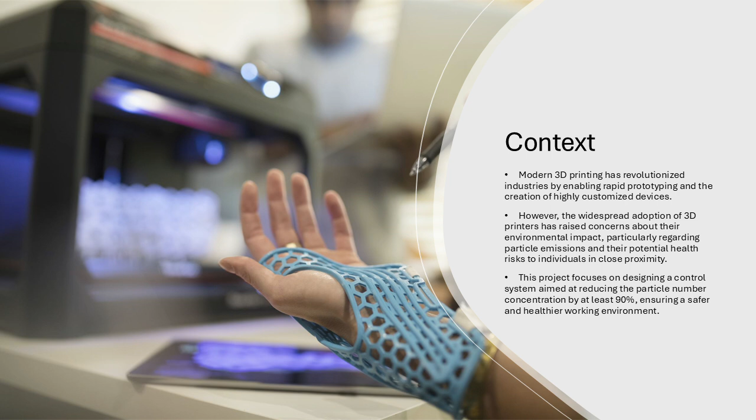So modern 3D printing has revolutionized industries by enabling rapid prototyping and the creation of highly customized devices. However, the widespread adoption of 3D printers has raised concerns of environmental and human health impacts. So the project we're working on today focuses on designing a control system aimed at reducing the particle number concentration by at least 90% to ensure a safer and healthier working environment.

So just some design parameters for this project. We looked at a typical 140 cubic meter makerspace with 10 3D printers. In this space, the particle number concentrations were found to reach up to 25,000 particles per cubic centimeter with a geometric mean diameter of 42 nanometers.

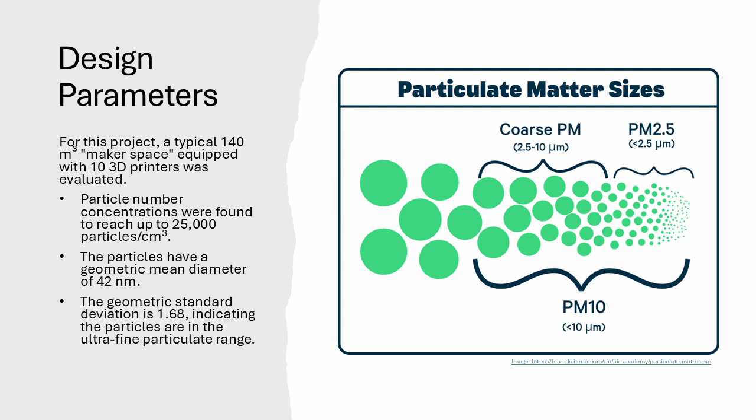This puts the particulate matter in an ultrafine particulate range, which can be very dangerous because smaller particles can penetrate deeper into the lungs, causing more significant and severe health impacts. These symptoms can start out with things like coughing, throat irritation, chest tightness, and shortness of breath, increasing in significance to risk of heart attacks, irregular heartbeat, and even stroke.

Water-based filtration was initially considered as a method for managing ultrafine particle emissions in a 3D printing makerspace. This method operates by passing air through water, where particles are captured through impaction and diffusion. Water filtration systems can remove particles efficiently, achieving up to a 90% reduction, particularly for ultrafine particles under 100 nanometers. These systems also offer advantages such as reduced clogging and waste, making them appealing for continuous use.

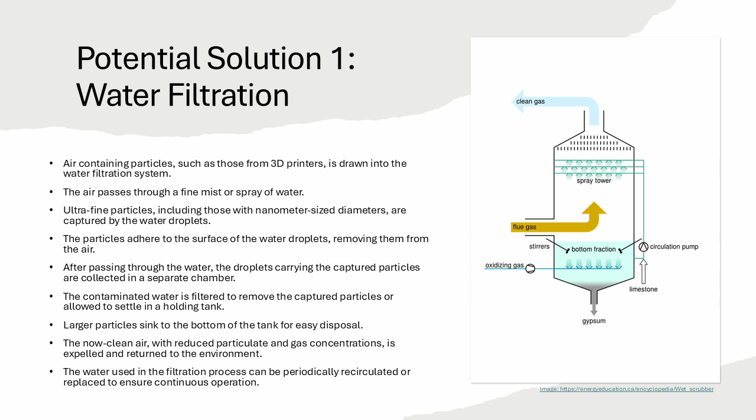However, the practical challenges of maintaining water filtration in a high-use environment became evident. The system requires regular water replacement and specialized drainage, which adds complexity and maintenance demands that could be difficult to manage in a busy makerspace.

MERV, or Minimum Efficiency Reporting Value, is a system used to rate the effectiveness of air filters at trapping particles of various sizes. MERV filters are widely used in air filtration systems to capture particulate matter, including the fine particles emitted by 3D printers. Filters with higher MERV ratings, particularly those in the range of MERV 13 to 16, are highly effective at trapping ultrafine and submicron particles, which are common in 3D printing emissions.

The filtration process involves drawing air containing particulate emissions into the system, where it passes through a series of filters, each designed to capture particles of specific sizes. The higher the MERV rating, the more capable the filter is at capturing smaller particles. As the air flows through these filters, the particles become trapped, reducing airborne particulate concentrations. The cleaned air, now with fewer particulates, is then expelled back into the environment.

While MERV filters are relatively easy to install and require less maintenance compared to water-based filtration systems, they do necessitate regular replacement to maintain their effectiveness. They also face some limitations in environments with higher concentrations of particulates, as is the case with a busy 3D printing space. Combining MERV filtration with local exhaust ventilation can further enhance performance by capturing emissions directly at the source.

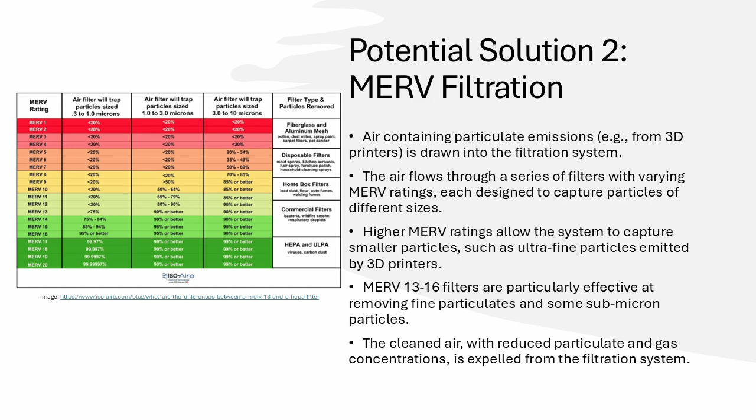All right, moving on to potential solution number 3, we have fume hoods. When these 3D printers are in use, they can, of course, release harmful particles, fumes, and gases into the air, some of which are carcinogenic. Using the fume hood, the contaminated air is drawn into the hood through the front opening, typically through a sash or a door, and in this hood, the system maintains a slightly negative pressure, which pulls the air from the room rather than leaking out.

This negative pressure helps to contain the harmful emissions and prevents them from escaping back into the workplace. Once inside the hood, the airflow carries the contaminants towards the exhaust. This airflow is specifically controlled by the unit. It typically consists of roughly 80 to 120 feet per minute, and this just ensures that all the contaminants are going towards the hood and not back into the room.

After capturing the contaminants, the air is directed either to a filtration system or vented outside. Many fume hoods use filters such as HEPA filters to filter out the particulates within the room. To ensure everything is functioning properly, fume hoods are equipped with airflow monitors.

These monitors are able to track the airflow and alert users if it drops below safe levels, which could be an issue if a filter becomes clogged or if the fan malfunctions. In providing this real-time feedback, it helps ensure the safety of the workers within the room. In short, fume hoods are really vital for keeping the air clean when working with these 3D printers and can prove to be a good tool in achieving clean air.

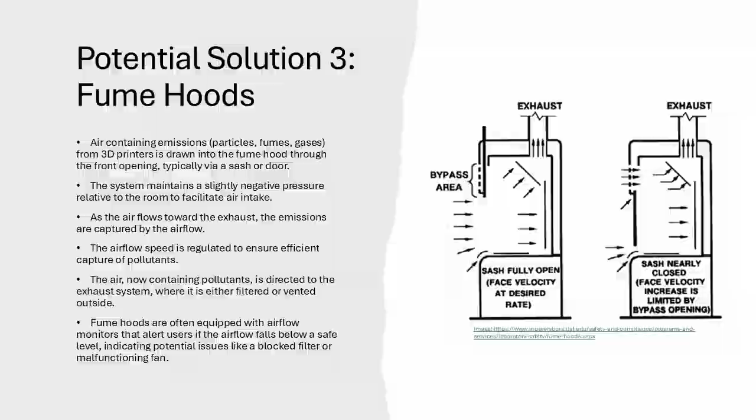The stakeholders impacted by the implementation of a fume hood in a 3D printing environment span several key groups, each with distinct priorities and concerns. First, the primary users, students, researchers, and makers are at the forefront. Their health and safety depend on effective air quality management, as prolonged exposure to ultrafine particles can lead to respiratory issues. A fume hood, by reducing airborne particulates, ensures a safer space without introducing complex waste management challenges.

Second, facility managers and educators play a pivotal role. They are responsible for maintaining compliance with safety regulations and minimizing operational disruptions. The fume hood's efficiency and reduced maintenance requirements align with their need for practical, cost-effective solutions. Unlike filtration systems that generate solid or liquid waste, a fume hood simplifies waste management, easing their logistical burden.

Third, regulatory bodies and environmental agencies are critical stakeholders. As air quality regulations continue to evolve, implementing a fume hood demonstrates proactive adherence to environmental standards. While exhaust emissions require oversight, they present fewer disposal challenges compared to solid waste, offering a more manageable compliance pathway.

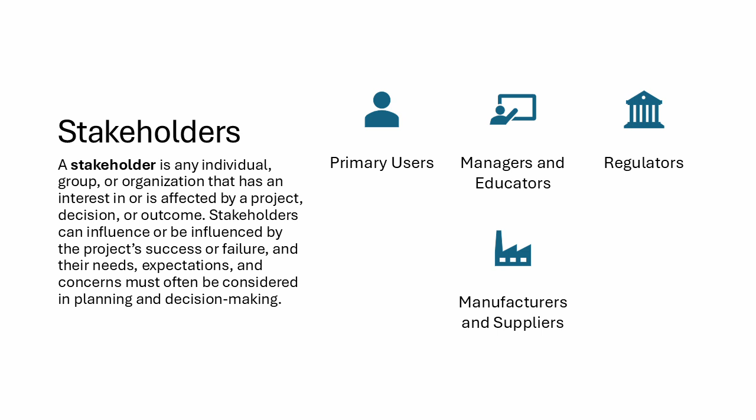Finally, manufacturers and suppliers of 3D printing equipment have a vested interest. By incorporating fume hoods into their designs or offering them as accessories, they can meet growing market demands for sustainability and health-conscious innovation, enhancing their competitive edge. This broad spectrum of stakeholders underscores the importance of balancing safety, efficiency, and environmental responsibility in advancing 3D printing technology.

So, after carefully evaluating the previous options, we chose fume hoods as the optimal solution for managing our emissions from the 3D printers. There are a few key reasons why fume hoods stand out to us. First, in terms of the environmental impact, water and MERV filtration systems produce solid or liquid waste that needs to be properly disposed of, which can be challenging to manage safely, especially in a company that is not used to environmental regulations. In contrast, a fume hood releases particulate matter into the atmosphere, and the exhaust air is way easier to control and manage than solid waste, making it a more sustainable option overall.

When it comes to energy efficiency, fume hoods also are more practical. They're more energy efficient to run compared to water pumps, which often require additional power for filtration and fluid circulation, and it makes the fume hoods more cost effective. Lastly, from an economic standpoint, there are fewer ongoing costs associated with fume hoods. With water filtration systems, there are added expenses for waste removal, energy consumption, and more frequent maintenance. Fume hoods, on the other hand, offer a simpler, more streamlined solution that reduces both waste-related and energy costs.

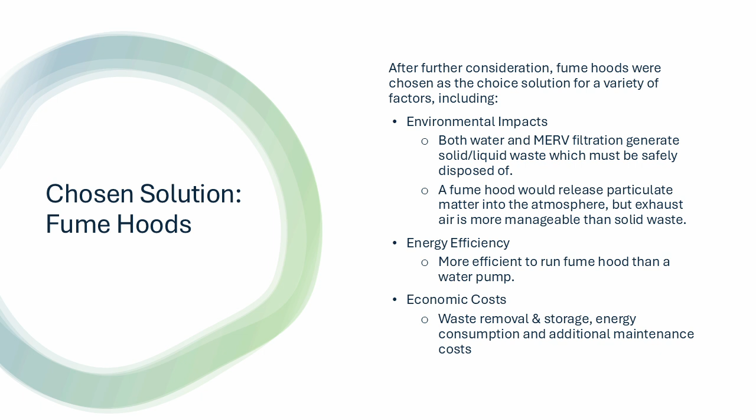Overall, considering environmental impact, energy use, and cost efficiency, fume hoods provide the most balanced and sustainable solution for managing 3D printer emissions. Alright, before we get into designing our fume hood system, we have to talk about our assumptions and given operating parameters.

So for given values, we're given a room size of 140 cubic meters, 10 printers, a particle concentration of 25,000 particles per cubic centimeter, with a mean particle diameter of 42 nanometers, with a geometric standard deviation of 1.68. So our assumed design parameters that we took liberty in with this project is the width of a printer is 0.62 meters, the depth of the printer is 0.626 meters, and the height of the printer is 0.760.

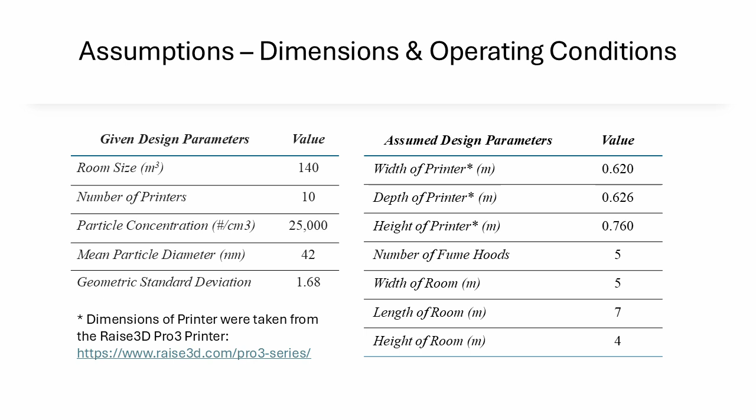We chose a number of 5 fume hoods in total, and the width of the room is 5 meters, the length being 7 meters, and the height being 4 meters. This gives us a total room size of 140 cubic meters. And going back to our design of our printers, all of these design dimensions were taken from the Raise3D Pro 3 printer as shown at the hyperlink at the bottom of this slide.

To model the removal of particles from the makerspace, we must first establish the fume hood's fan flow. The fan flow is based on the face velocity on the opening of the fume hood sash. So as you open the sash farther, the fan will need to increase its speed. The volume of air exhausted will be the summation of each fume hood's fan flow.

The air changes per hour, or ACH, is the measure of how often clean air replaces the volume of a room. In a non-pressurized room, the clean air rate is equal to the volume of air exhausted. It is noteworthy that fume hoods require slightly negative pressure to make sure that all of the air gets exhausted, so the clean air rate will be slightly less than the volume of air exhausted.

As far as the removal efficiency, it's slightly counterintuitive, where the concentration of the upstream air is actually equivalent to the concentration of the exhausted air, and downstream is the concentration of clean air. This is because the original model of removal efficiency is based more on filtration or some other kind of removal, whereas in our case with the fume hood, we're relying on the dilution of the atmosphere.

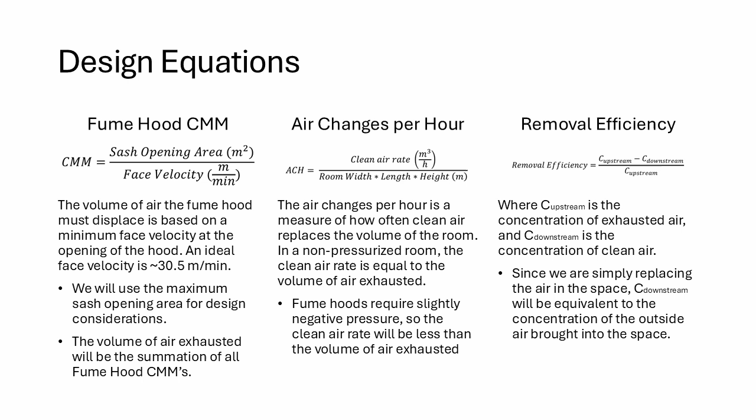The removal efficiency of our fume hood is based on the upstream concentration, which is going to be equivalent to the exhaust air, and the downstream concentration, which will be the equivalent of air entering the fume hood. This is a little counterintuitive to most mass balances detailing a filtration model, where particles go through a filter and are removed from the airspace. In our case, we're exhausting air from the fume hood into the atmosphere.

Assuming that we exhaust the air in an appropriate way, it will be well mixed and diluted enough to be negligible. So when the air comes back through the building's HVAC system, the concentration downstream will be equivalent to the average amount of clean air, which for ultrafine particles is equivalent to about 2,610 particles per cubic centimeter.

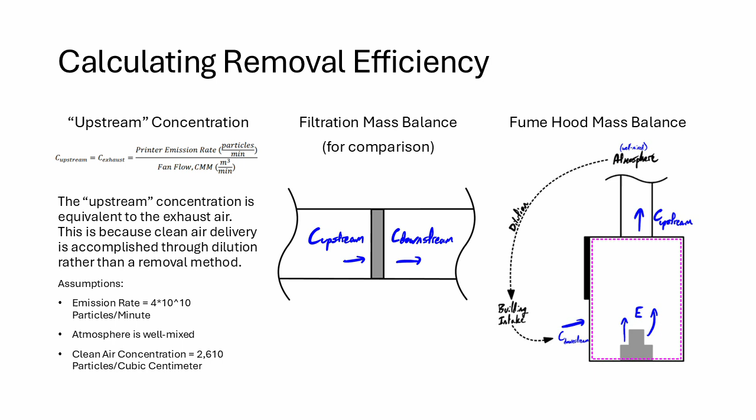We're also using an assumed emission rate for each 3D printer, with about 2 × 10^10 particles per minute per printer. With 2 printers in one fume hood, that's equivalent to about 4 × 10^10. As a result, we see an inverse relationship between the opening sash in the fume hood and the removal efficiency. This is because as you open the sash further, you'll need a higher fan flow. The fan will be working harder to remove air from the space.

Whereas if the fume hood was completely closed and the fan was able to operate at a negative pressure, all of the dirty air from the makerspace would be removed and there would be no concern about particulate concentrations. As the sash opens further, the fan will have to work harder to remove the same amount of particles from the space. If the sash was closed completely, the fan would be able to effortlessly remove these particles.

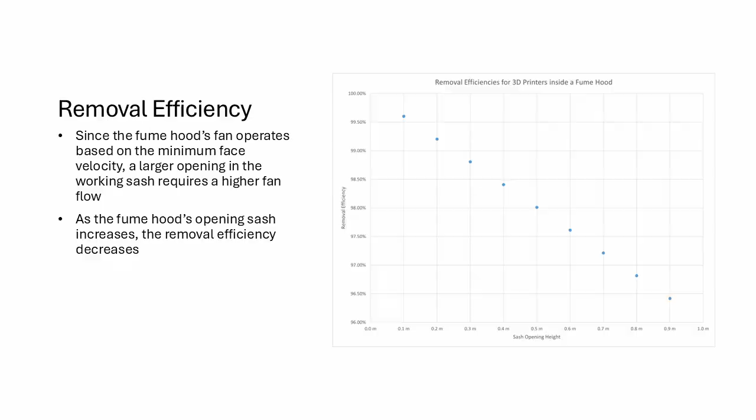So long as the methods of exhausting air are appropriate, the particles emitted from the makerspace should be diluted to safe levels into the atmosphere. This will allow those in the makerspace to be confident that the clean air intaked into the building will be free from particle concentrations. Those working inside the makerspace would also benefit from reduced ultrafine particle emissions, which includes decreased risk of respiratory issues, cardiovascular disease, and impacts on fetal development, as well as other severe health concerns.

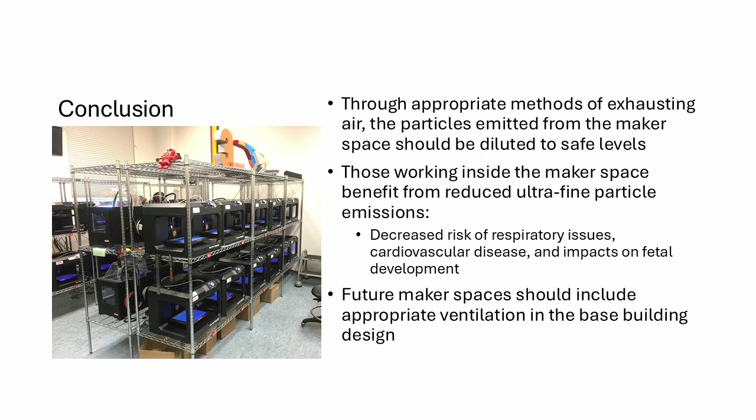While fume hoods may have been an appropriate fix in this scenario, future makerspaces should include appropriate ventilation in the base building design, such as using pressurized rooms or other methods to safely remove particles from the space. Thanks for watching our presentation on the reduction of 3D printing emissions.